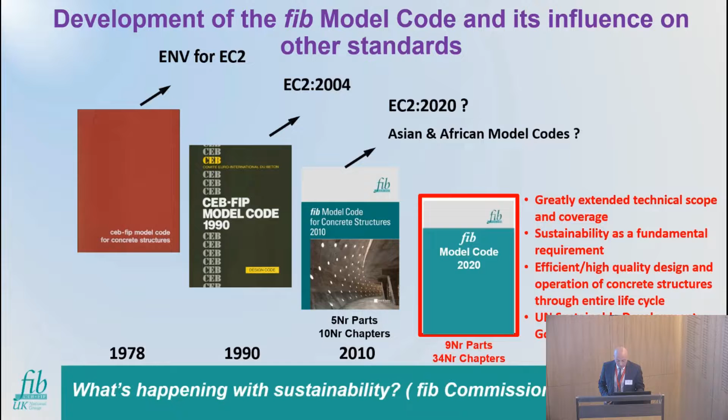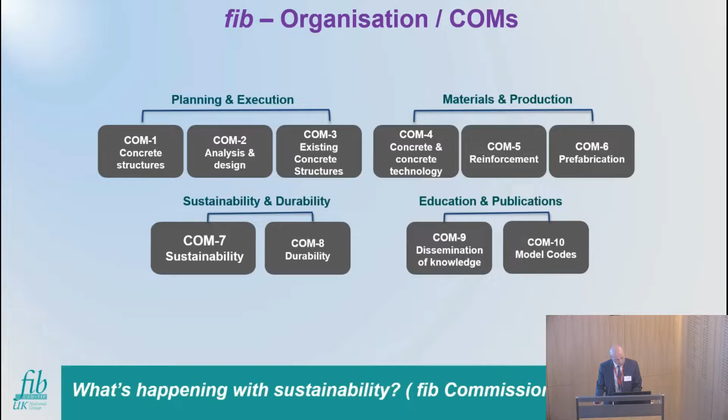FIB published lots of technical reports, state-of-the-art reports, textbooks, manuals, guides, recommendations, and also model codes. FIB has also a series of technical documents based on sustainability aspects. Some of them have already been presented here this evening, but I would like to show you a couple of the reports created by FIB commissions.

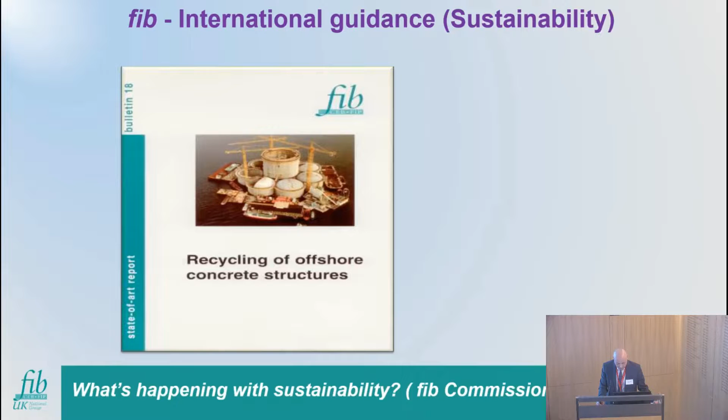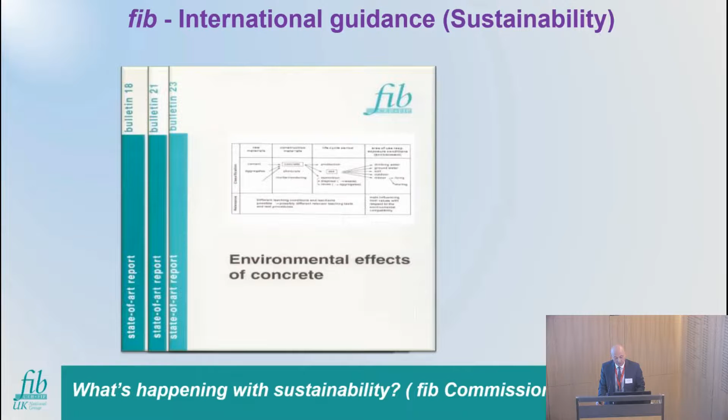The first one is about recycling of offshore concrete structures, published in Bulletin 18, April 2002. Another report on environmental issues in prefabrication was published in March 2003, and another, Environmental Effects of Concrete, was published in June 2003. Another report on environmental design was published in February 2004.

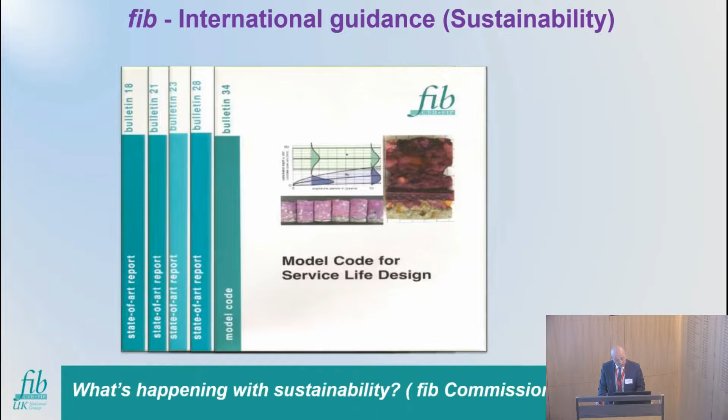There is a model code for service life design, published in February 2006, and another technical report on environmental design of concrete structures, published in August 2008. There is also a good practice document about green concrete structures.

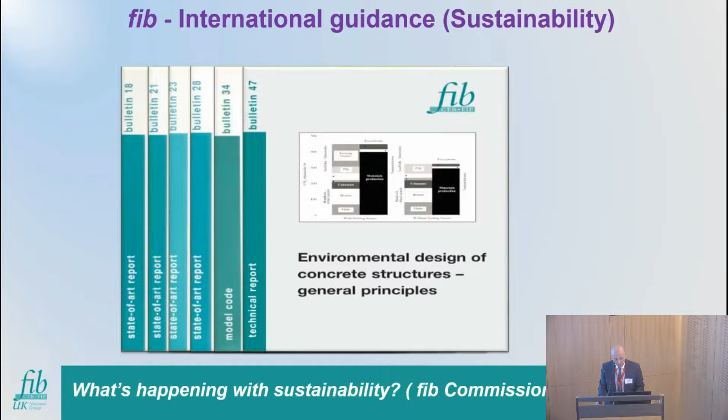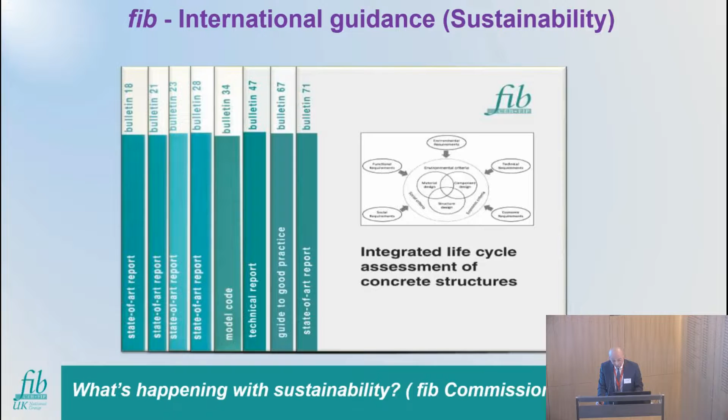This was published in May 2012. Then another state-of-the-art report about the integrated LCA of concrete structures was published in December 2013. And finally, as mentioned this evening, a state-of-the-art report was published in December 2018. These are all relevant to sustainability aspects.

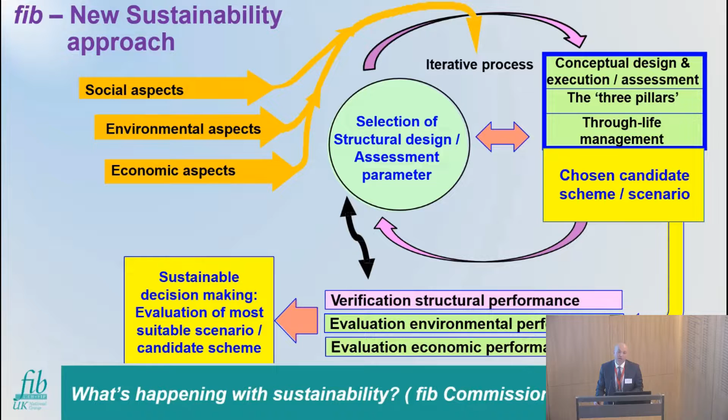The new approach to sustainability in Model Code 2020 has different inputs. It includes stakeholder engagement, conceptual design and execution assessment, evaluation of the 3 pillars of sustainability—social, environmental and economic aspects—through-life management, and evaluation of the most suitable scenarios and schemes.

When you're involved in the commissions, you realize that mostly international standards are well accepted within the FIB community, so they try to avoid national standards. That's why our sustainability part also tries to reference the relevant ISO standards. There are many links with UN SDGs like climate change, and responsible consumption and production.

Some of the standards, ISO standards, which we are following and monitoring—some of our committee members are also involved in developing these standards, especially Japanese academia, which is well involved in standard development. For example, ISO 13315 series is the standard relevant to environmental management for concrete and concrete structures.

We have the most recent one, Part 8, relevant to environmental labels and declarations. I strongly suggest you go through these standards—you'll find lots of good practices and standardized methods within them.

On top of that, there are also some standards available in ISO, like ISO 21929 Part 1, which talks about sustainability indicators for buildings. There's another standard under the same series, Part 2, which is for civil engineering works. So there's a variety of standards developed by ISO, and efforts are still underway to develop new ones.

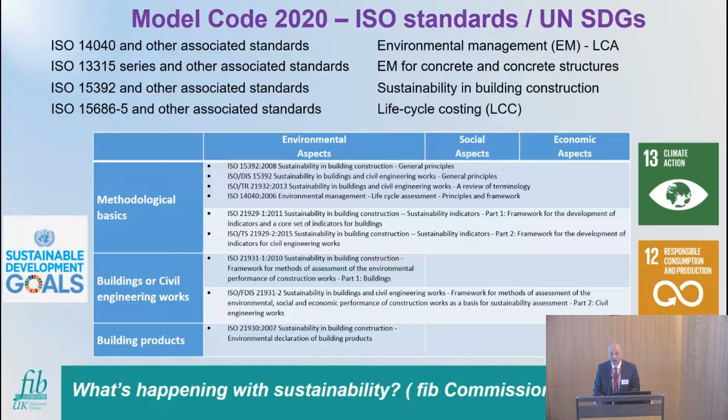Model Code 2020, as I mentioned, has already started its review process. TG 10.1 is aiming to produce the first general structural code for new and existing concrete structures, which fully integrates provisions for the design of new concrete structures and matters relating to existing concrete structures. There has been quite a lot of change in the model code.

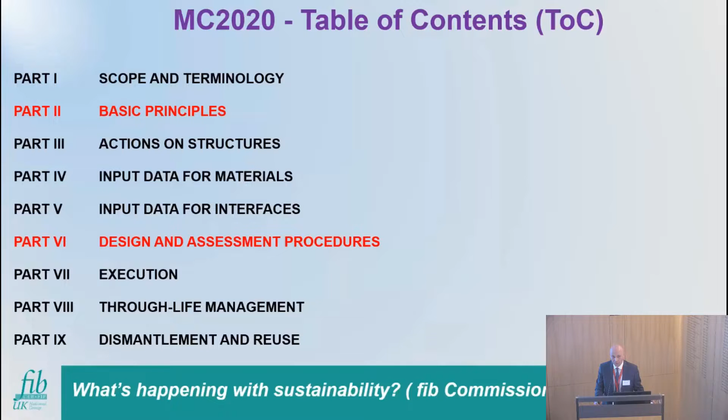These are the 9 parts of the new model code, with a total of 34 chapters. It's quite an extended code now. My concentration tonight will be on chapter 5, chapters 3 and 5 under part 2, and another one under part 6 with 4 chapters. These are mostly about the evaluation of sustainability aspects.

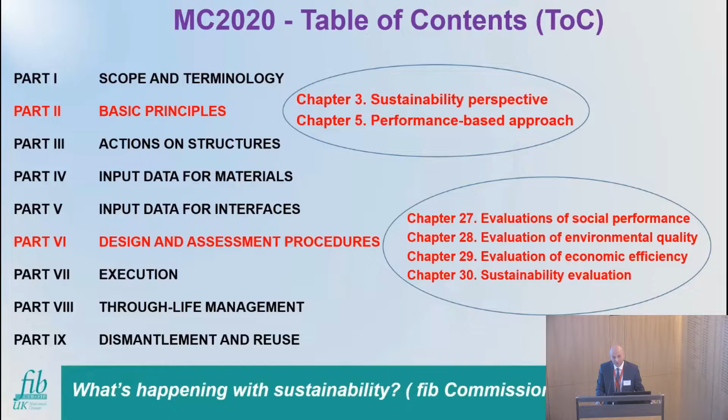This is the content of chapter 3. Sustainability approach is a key concept to be considered in all human activities, including all life cycle stages: design, production, construction, operation, maintenance, repair, and demolition of any building or civil engineering work forming the built environment. The crucial importance of considering sustainability within all life cycle stages of any concrete structure follows from the amount of produced concrete, resulting in the fact that concrete is the most widely used construction material in the world.

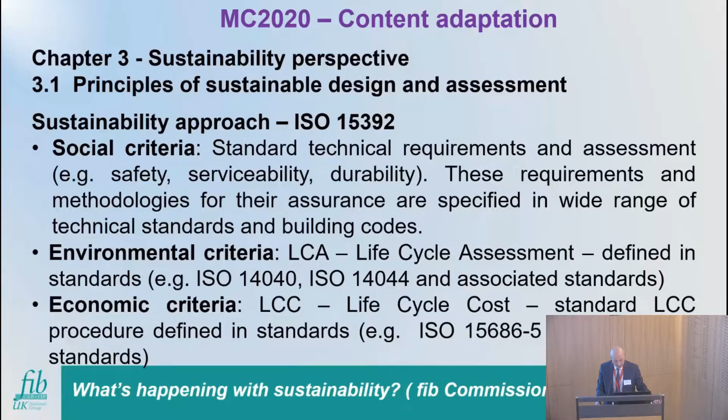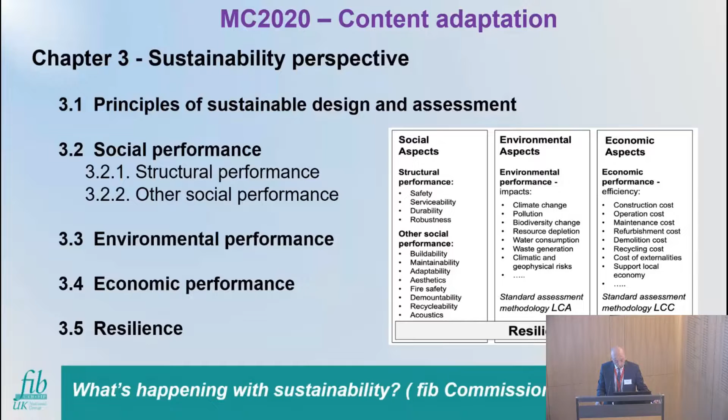Chapter 3.2 is about social performance, and here they have decided to split into two groups. The first group covers structural performance, and any structure should provide a long life, safe and high quality environment for its accepted function within the entire life of the structure. Basically, this includes structural safety, serviceability, and condition limit states associated with durability.

And then on the other side of social performance: acoustic comfort, which is a positive action of the high specific weight of concrete; thermal comfort, a positive action of thermal mass; visual comfort; and fire safety. All these aspects had to be considered during the development of Model Code 2020.

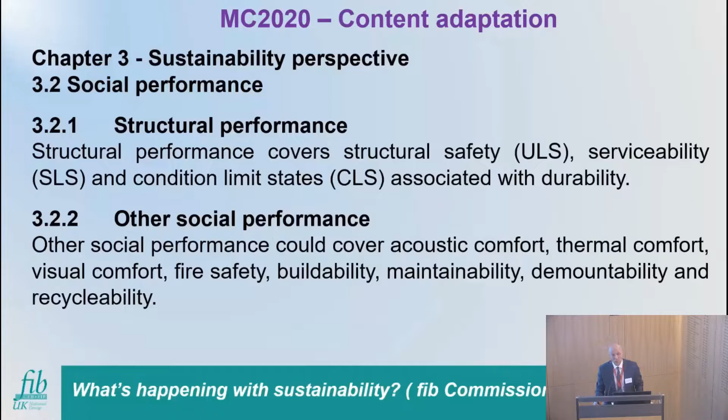Chapter 3.3 is environmental performance. As you know, the world construction industry consumes around 50% of the total world resources, so there is very significant resource use. Energy consumed by construction and operation of buildings and infrastructure is also about 40% of the total energy consumed all around the globe, so it's quite significant.

The amount of harmful impacts embodied in concrete is, in comparison with other building materials, relatively small. However, with respect to the high production of concrete, the final negative environmental impact on a global scale is very significant. These are the key associated impacts we will be concentrating on in Model Code 2020.

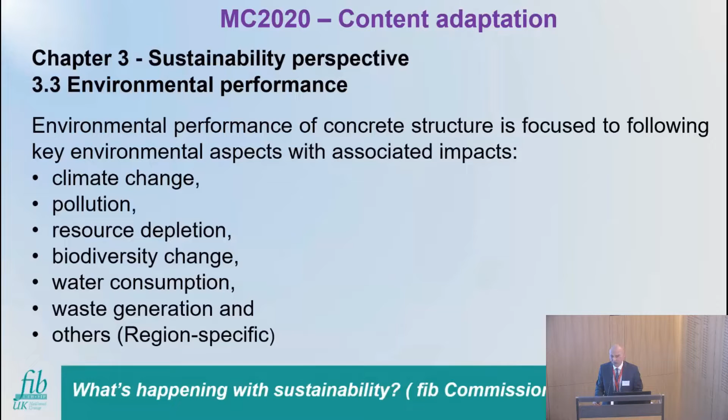Climate change, of course, one of the SDGs, pollution, resource depletion, biodiversity and biodiversity change, water consumption, waste generation, and also some other regional aspects, because when you go to specific regions you may also have different environmental aspects.

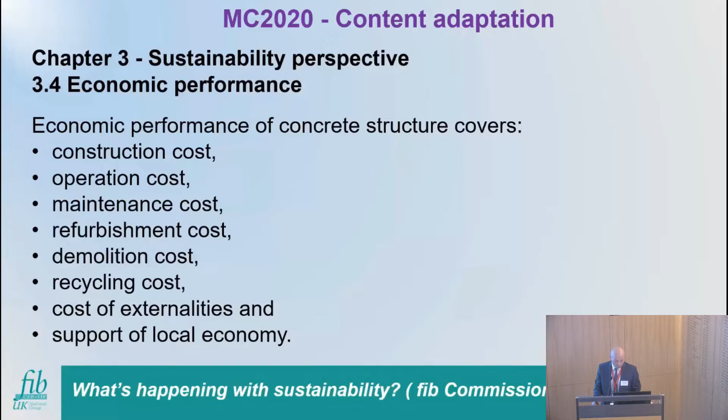Chapter 3.4 is about economic performance. You all know there are economic aspects in this area. Again, the construction industry is very important to the global and also local economy. The industry contributes 10% of global GDP, and is also one of the important employers, providing work to almost 7% of the total workforce in the world. So all these aspects should also be considered in the model code.

Chapter 3.5 is about resilience, which sits on top of, as I mentioned, all three pillars. Resilience is the capacity to adapt the system to changing conditions and to maintain or design a new structure or regain functionality. So resilience should sit on top of each social, environmental, and economic aspect.

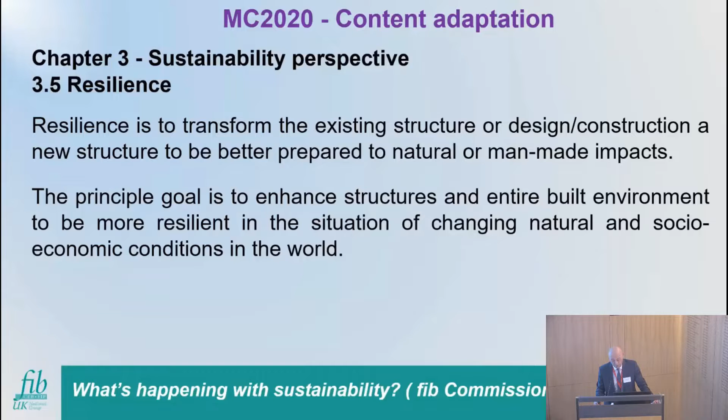I just wanted to show this structure because it's still under development, and commission-wise we are also trying to contribute to this part. But chapter 5 will include structural performance, environmental performance, economic performance, and resilience.

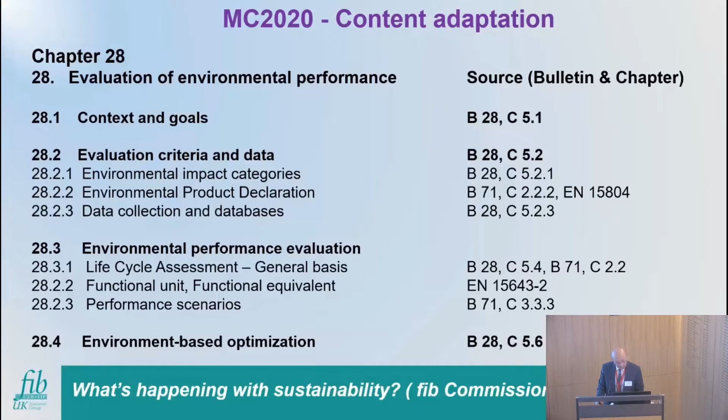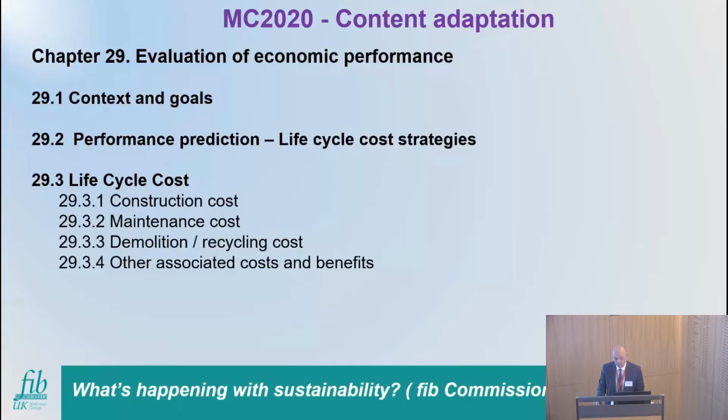This is chapter 28, evaluation of environmental performance, and this is the context and content of this chapter. Chapter 29 is about the economic part of the evaluation, and this will be the content in Model Code 2020. Life cycle cost sits at the middle of the concentration and focus.

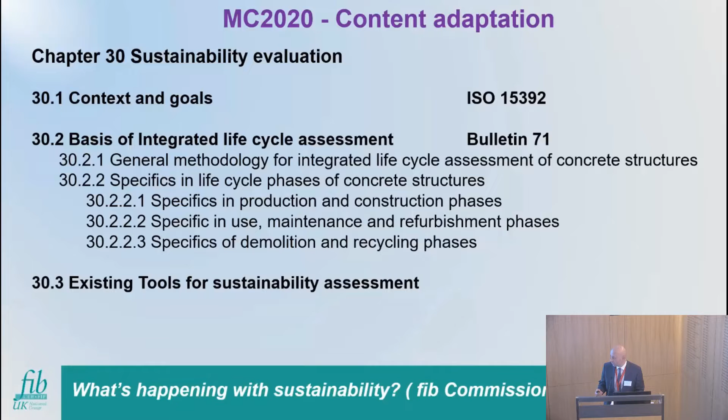Chapter 30 is about sustainability evaluation. We are considering an integrated life cycle assessment, and we should be defining the methodologies identified in this part, and also identifying the existing tools for sustainability assessment.

The second part of my presentation covers something I'm actually involved in. Commission 7 started activity in January 2015, followed by, in total, I guess 7 meetings. The last 2 meetings were in Malta and Melbourne. We try to attach all our meetings to symposiums or FIB events. The next one will probably be in Krakow, Poland. We are targeting academia, designers, consultants, producers, contractors, authorities, and governmental institutes in Commission 7.

This is the scope and objective of Commission 7, briefly. We are trying to develop a strategy as to how to incorporate sustainability issues into the design, construction, operation, and demolition of concrete structures.

We try to contribute to the development of Model Code 2020. The focus is on reduction of CO2 emissions, especially from concrete production, reduction of energy, improving the performance quality of internal environment, reduction of waste to landfill, since a huge amount of waste is generated by the industry, and development of EPDs, metrics, recycling and use of recycled materials, and resilience of the structures.

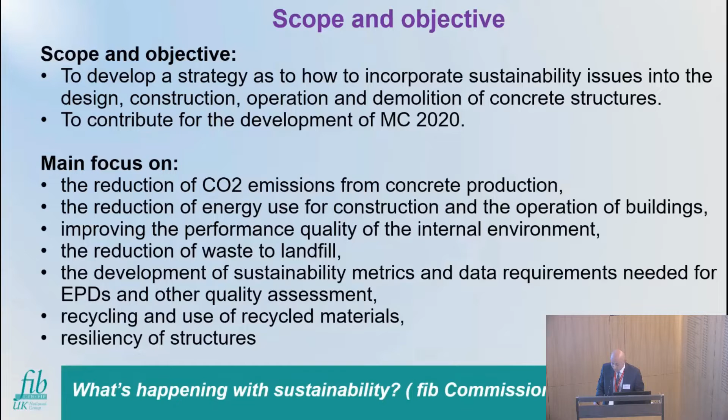These are the main focus points of this commission. This is the current structure of Commission 7. You can also see the chair and the convener for each task group.

Commission 7 incorporated task groups which existed under the former FIB structure in Commission 3. For example, TG 7.2 was formerly TG 3.9, and TG 7.4 about sustainable civil structures was formerly TG 3.11. So there has been some work on top of these subjects and task groups, but now we are trying to improve what has been done before.

Task group TG 7.1 deals with the framework, and this was established in January 2015. Two more task groups were established recently, TG 7.6 and TG 7.7. The representatives of these last two groups are from Italy.

We collaborate with other commissions: Commission 1, TG 1.5 structural sustainability; Commission 6, prefabrication; Commission 8, durability; and also Commission 10 for the model codes. We also collaborate with ACI Committee 130, which deals with sustainability of concrete, and I think is still chaired by Sean in the US.

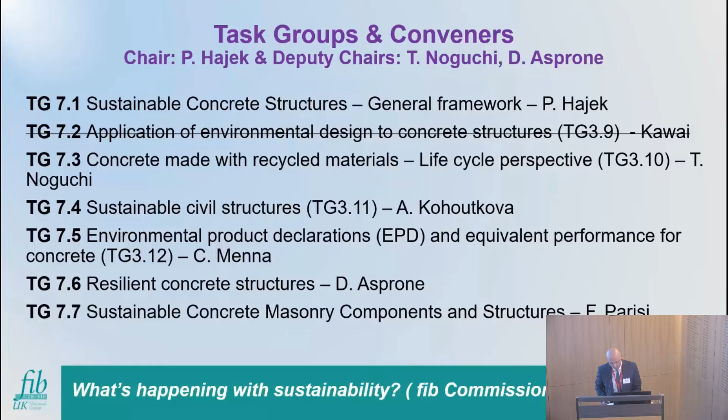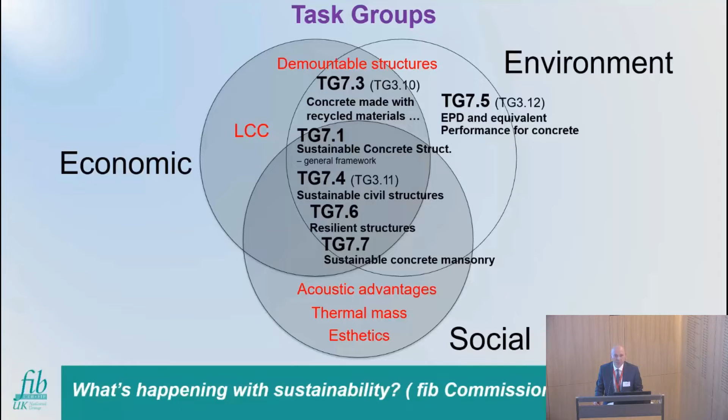There are three pillars, and our task groups sit within these three sustainability aspects. As you can imagine, TG 7.1 is the framework that sits in the middle, and then 7.4, 7.6, and 7.7 relate to resilience, also sitting in the center. We also have other task groups relevant to environment, like 7.5 EPDs.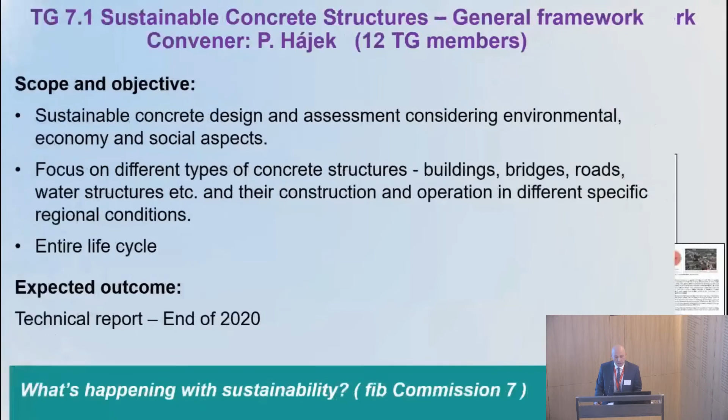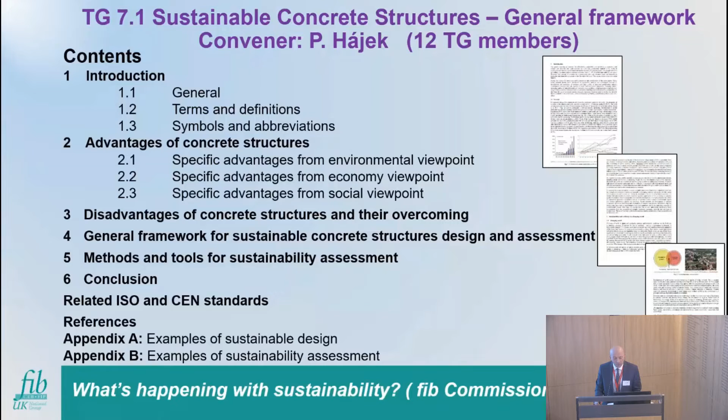I think they had good progress with the support of Professor Hájek from Czech Republic, so maybe the report will be ready before 2020.

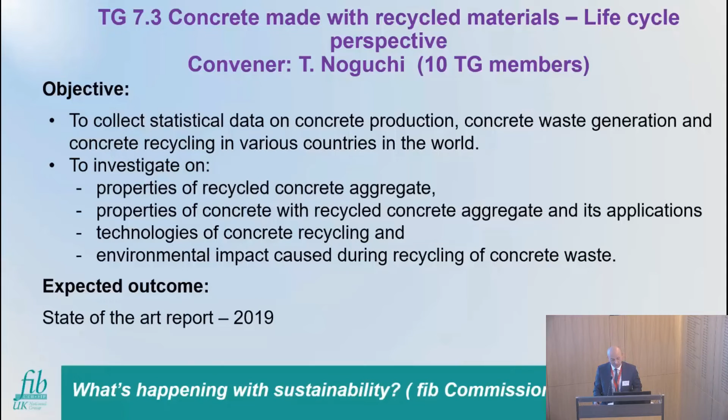Then 7.3 is about the life cycle perspective, especially for recycled materials. This is managed by the Japanese FIB members, and there's good progress here too. There will be a state-of-art report, and this will be published in 2019.

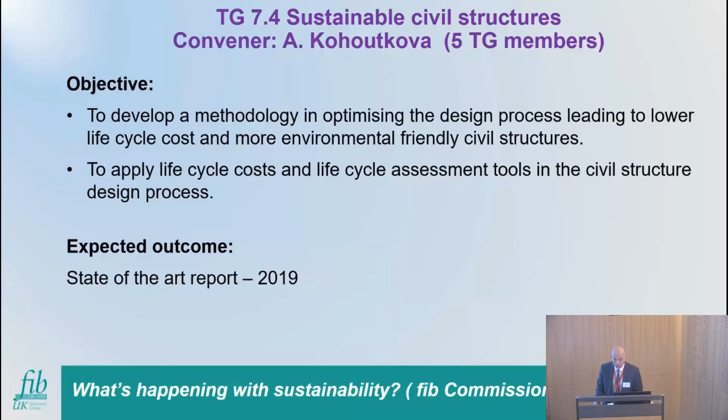We also have TG 7.4 concentrating on civil structures. The convener is from Czech Republic, and they are also trying to issue a state-of-art report in 2019.

This is where I am involved. I am the deputy convener of TG 7.5. Unfortunately, we had some gaps and it was inactive. Now, with the support of myself and Professor Menna from Italy, we reactivated the group, and the kickoff meeting will be in May 2019 in Krakow.

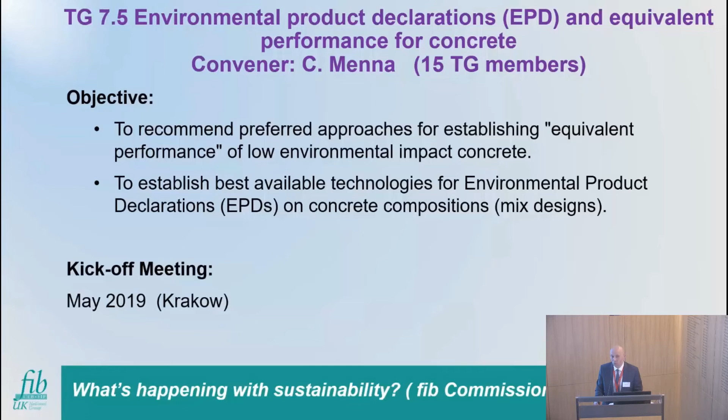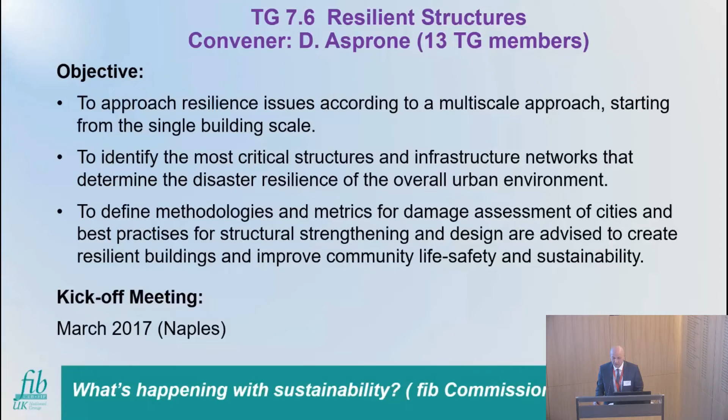TG 7.6 had its kickoff meeting in March 2017 in Italy. This group deals with resilient structures, and the convener is from Italy.

This is the last one. Professor Parisi is also from Italy, and the kickoff meeting was in March 2017. They are concentrating on sustainable concrete masonry components and structures.

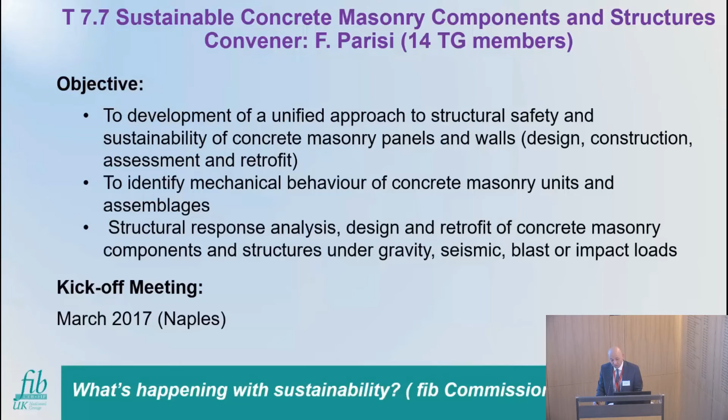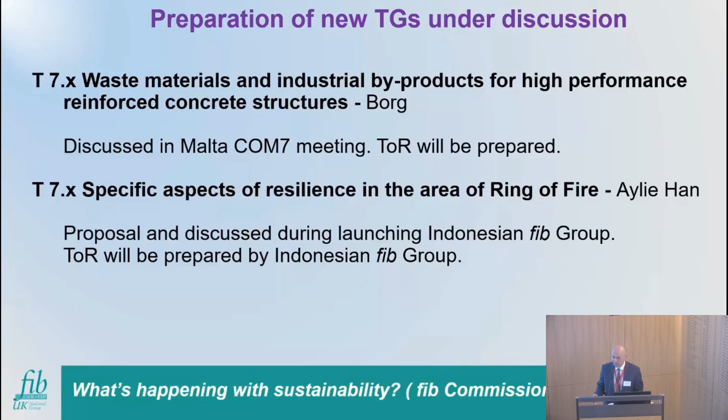Two more proposals from the members: from Malta, Professor Borg proposed a new TG within Commission 7, and also from Indonesia we have a new proposal. Just for your info, the proposals have to be reviewed by the FIB top management technical committees, and then after that, if accepted, you can start taking action.

As CARES, we are trying to also present technical papers. Two of our papers have been accepted by FIB, one about post-tensioning and the other about sustainability, so we will be presenting two papers.

Next year, there will be an international conference in Prague with the support of Prague Technical University. You are all welcome. Thank you very much.